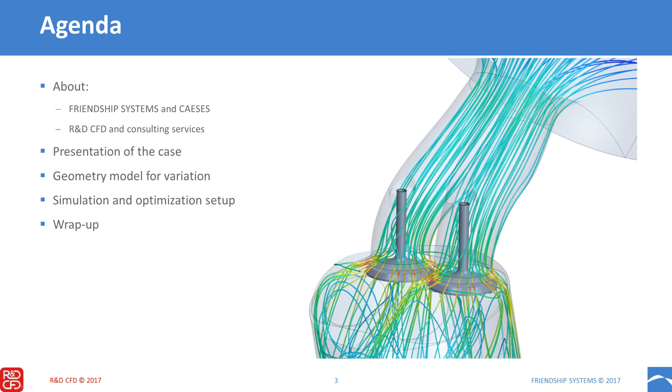So to start with Friendship Systems, who are we? We are a company, a software company mainly, that partners up with our customers to solve any kind of problems that they encounter in the so-called simulation-driven design process. The company exists since 15 years, and we have a lot of experience in the fields of geometry parametrization, specifically of complex geometries, as well as optimization.

So what do we do in this software? The software has a few different components. The first of all is the optimization part. So here it offers all the algorithms that you would need to drive an optimization process or simply a DOE process. And when you generate all the data during the optimization, you have to manage that data somehow. It's geometry data, simulation data, other kinds of results, and that needs to be organized and managed. And finally, you need assessment tools to analyze this data and draw your final conclusions from the optimization process.

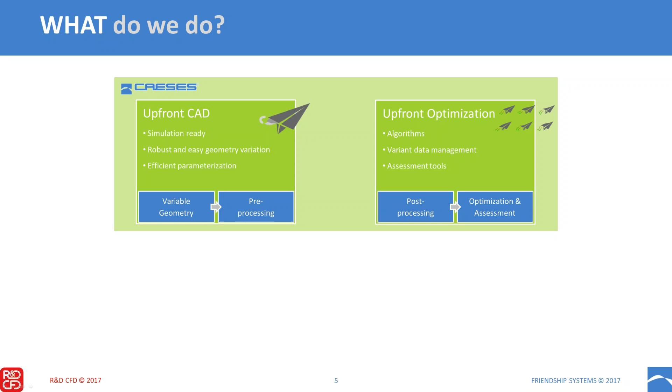And another important point is the efficient parameterization of the geometry, so that you describe your geometry with as few parameters as possible, which definitely helps you to save time in the optimization process. And to complete the whole process, we have a generic interface that can be used to couple our software CAESES to any type of external simulation software, most often CFD tools, that will then, in the optimization process, take care of the meshing and the solving and possibly post-processing of these cases.

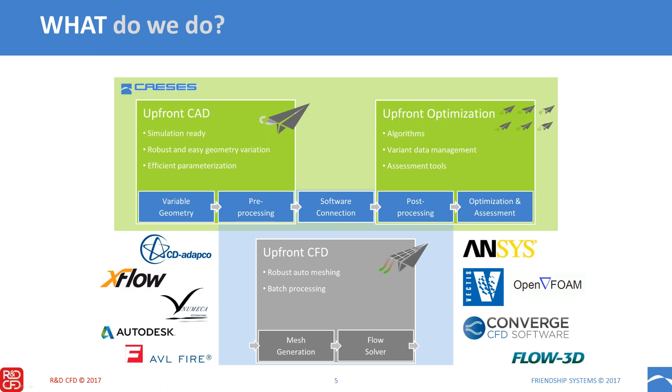So the first question, which I think maybe is not so difficult to answer, is why should I automate my design process with CAESES or in general? And the situation that we have is that laws and regulations, but also the tough competition in the market, demand a very high level of performance in modern engine design. So the, let's say, old type of process where you have a manual iteration between your CAD generation, creating a mesh, running CFD, and then post-processing the results, and then going back to the beginning.

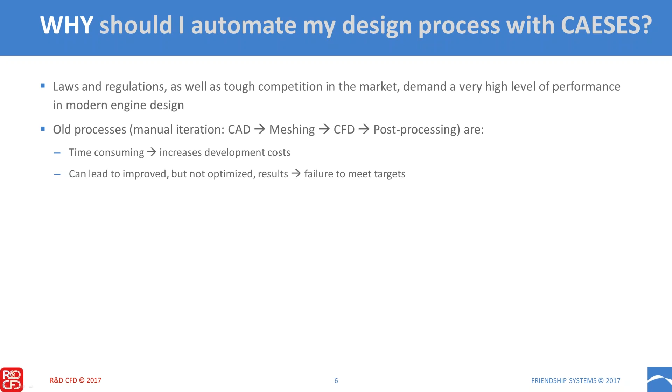This type of process is time-consuming for one, which of course increases development costs. And it can certainly lead to an improved design by iterating in this way, but not necessarily to an optimized design, so that there's going to be failure to meet the design targets. The automation, on the other hand, can shorten the development times because you can run everything in an automated process without user interaction. Can reduce the design cycles.

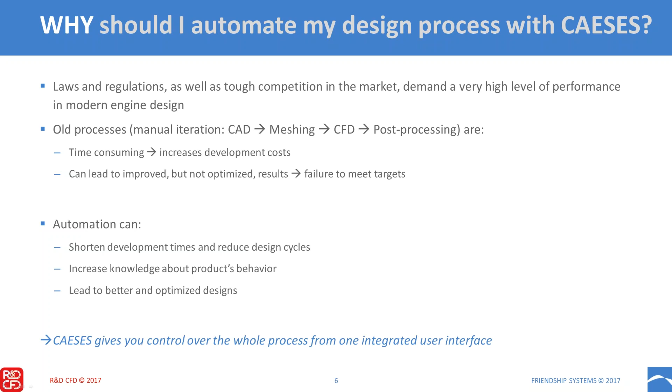And I think apart from leading, of course, to better and optimized design, I think an important point is that you can also increase very early the knowledge about the behavior of the product with respect to changing parameters and the feedback in terms of performance that these changes have. And of course, our tool CAESES is intended to give you control over this design process from an integrated and single user interface.

Another question, which for many people I know is a bit more difficult to answer. I told you a very important part of CAESES is this CAD system. So the question might be, why do I need another CAD system? So maybe you have already a traditional CAD system that is used to run the whole PLM process, CATIA, NX, Creo, whatever. And why do you need to include another additional CAD system into your process?

The situation here is that most of the typical bottlenecks that we encounter and our customers encounter when they want to run an optimization or design exploration process are actually related to the handling of the geometry. So in traditional CAD systems, for example, the geometry variation is often difficult or prone to failure. So it means you're changing some parameters and then the model fails to regenerate. Another point is that it is often difficult to consider, or maybe that's one step further, automatically fulfill certain constraints for manufacturing and so on.

And another bottleneck that is related more to the structure, how the companies work, is that the simulation engineers often depend on the CAD department to provide geometry variants. So if they want to change something in the geometry, they have to ask the CAD department to provide the new geometry. And that, of course, as you can imagine, not only costs a lot of time, but also is not really suited for automation.

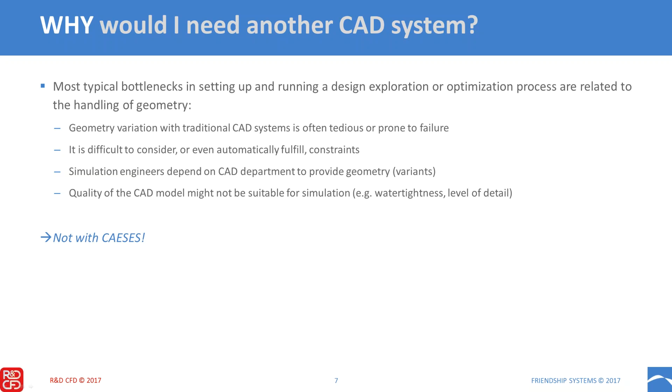So let's have a look at some powertrain applications that you can use this system for. The first of these is ports, which we will talk some more about today. Here you would like to directly control flow relevant parameters in the port geometry, for example, the distribution of the cross-sectional area along the path of the port. Maybe some specific aspects like considering blocking due to the valve bossing and stem that you want to consider in your cross-sectional area distribution, things like that. But we will see more about ports later on.

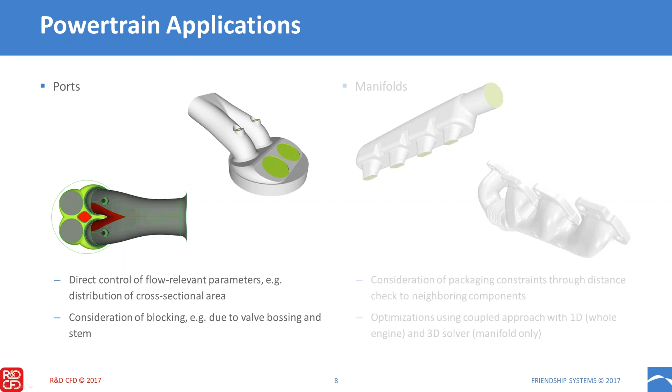Another application in the field of powertrain are manifolds, exhaust manifolds, intake manifolds. Here often an important point is the consideration of packaging constraints, and we have the possibility in CAESES to do a distance check to neighboring components so that you can make sure when you're varying the geometry that a certain minimum distance between the components is maintained. And we have done some work on this in the past.

A very interesting aspect here is to also couple 1D and 3D CFD solutions where you consider the whole engine system with a 1D systems simulation, and the manifold is then computed in detail using a 3D CFD solver.

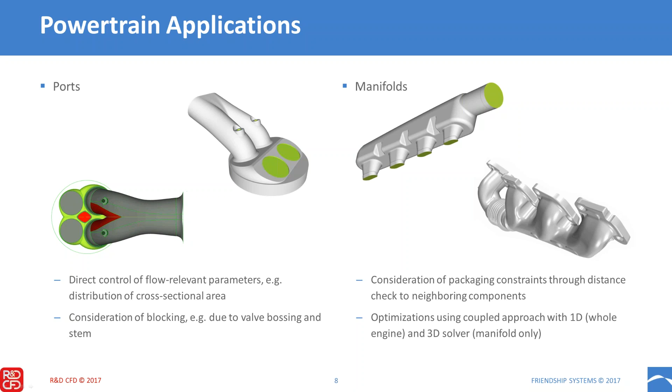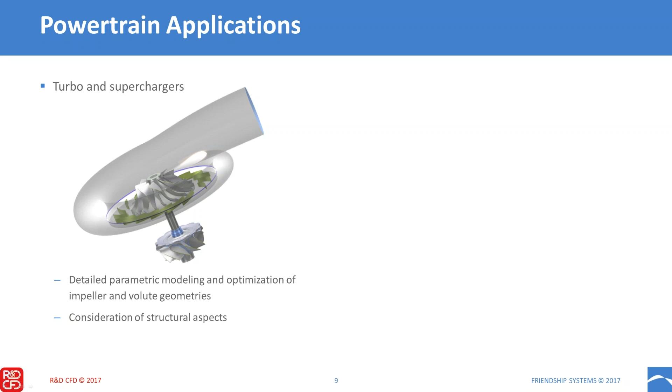Another application are turbo and superchargers. So here we have a lot of capabilities to do a detailed parametric modeling of the impeller geometry, but also the volutes. You can combine flow aspects with structural aspects for the turbine blades, for example, the strength and vibration connected, of course, to their flow behavior.

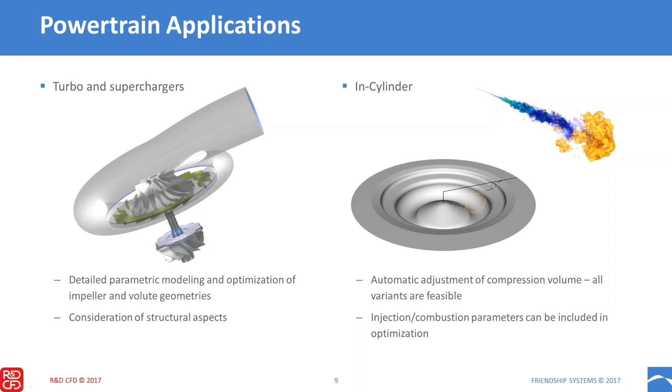Of course, you can combine the geometry optimization with other parameters related to the simulation, like injection timings, injection profile, spray angle, things like that can be taken into account in the optimization in parallel with the geometry optimization.

Exhaust systems are also another application. So here we have all kinds of ducts, diffusers, or urea mixers, things like that. Here we can use, of course, parametric morphing-based approaches, or an example that we also see here is the optimized routing of exhaust tubings under consideration of packaging. And many more applications in the field of powertrain that I'm not mentioning specifically now.

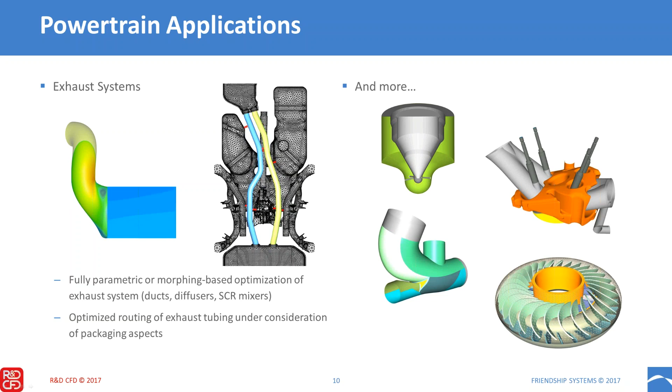So finally, how can you make use of CAESES? There are basically two ways. The first is as a so-called user. A user uses pre-configured models and setups. This doesn't need any training, so you don't need to learn how to use CAESES in detail. And you can make use of generic models that are provided by us, by Friendship Systems, or custom-made models that we can also provide. Or if you have an internal developer, so an internal CAESES expert that can create these models, then other people in the company can make use of that.

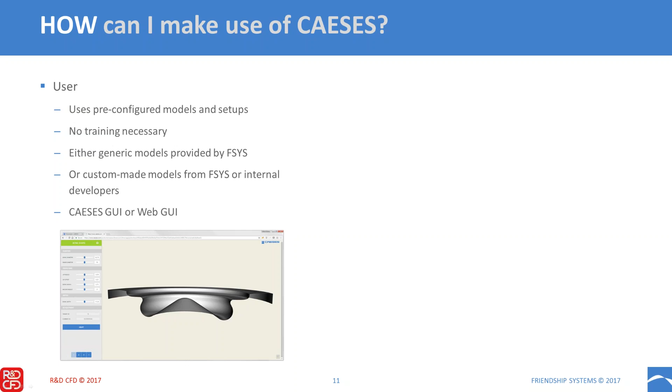The interface is either the actual graphical user interface of CAESES, or we also have the possibility of wrapping projects into a web interface that can be used in a very easy way and allows just limited access to a certain setup, parametric model, optimization setup, and so on.

And the second option is as a so-called developer. So this is basically the CAESES expert that is able to create complex parametric models or optimization setups for his own use or for other users in the company. And this, of course, needs a certain amount of training. And as I mentioned, it can support internal users, but also offer his services as a consultant.

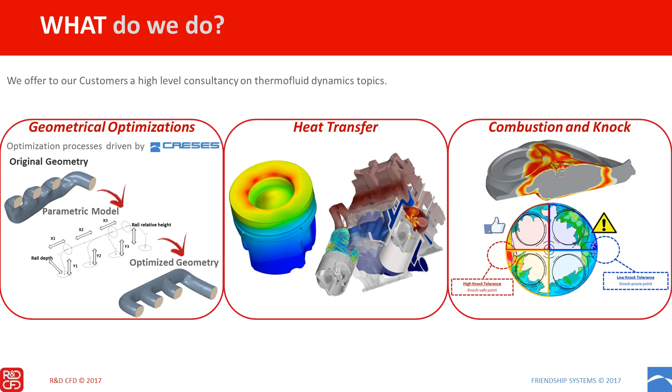We are very active on the combustion side and on knock simulation and prediction. Furthermore, we developed during this year proprietary approaches for sloshing simulation in tanks. We can simulate turbomachinery in a single or multi-phase way, and we are now approaching in a very efficient way detailed chemistry, especially related to pollutant emissions and to the knock behavior of fuels.

During these years, we developed some proprietary models, especially related to heat transfer, to knock in LES or RANS frameworks, and a statistical knock model that can be used in a RANS approach.

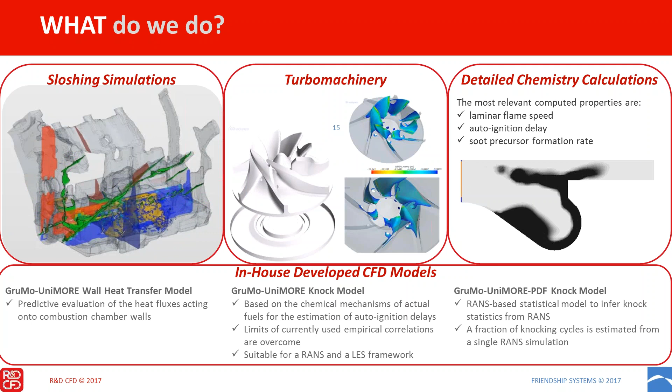As I told you a few minutes before, we can offer customers a joint consultancy with the Friendship Systems team, as we have done in previous years. We can offer our high expertise on the fluid dynamics side in order to carry on the project from its creation up to the final report with the optimized geometry that can be delivered to our customer.

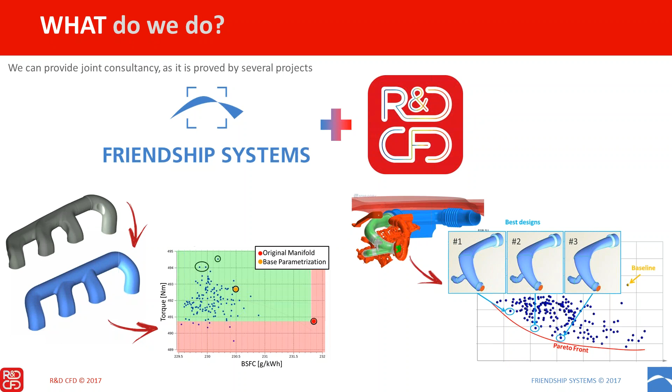All right, thank you, Giuseppe.

So now let's take a look at the example case that we worked on. So this, as I mentioned already, it's going to be an intake port. And as you probably know, intake ports along with the valves that are located at the end of them are responsible for the mixture formation, especially in GDI and diesel engines.

Also the charge motion, where you would like to create well-structured vortices so that you minimize the energy dissipation in the cylinder. And also they are responsible for the trapped mass of air that you will finally have in the cylinder for combustion. And this is important when you want to increase engine performance. So our topic today is an optimization of an intake port.

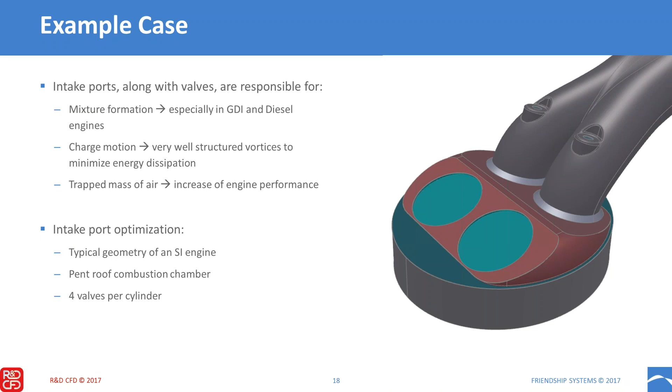And what we have here is a typical geometry of an SI engine. We have a pent roof combustion chamber, as you can see in the picture on the side, and 4 valves per cylinder. The design targets that were followed in this optimization are the maximization of the discharge coefficient or port permeability. Giuseppe will tell you more about all of these targets. The second one is the tumble ratio, and these two were the optimization targets.

We want to optimize these 2 values, and in addition we also evaluated some other parameters like the turbulent kinetic energy in the region of the spark plug, as well as the swirl motion in the cylinder, also known as omega tumble. Again, Giuseppe will explain these things in detail.

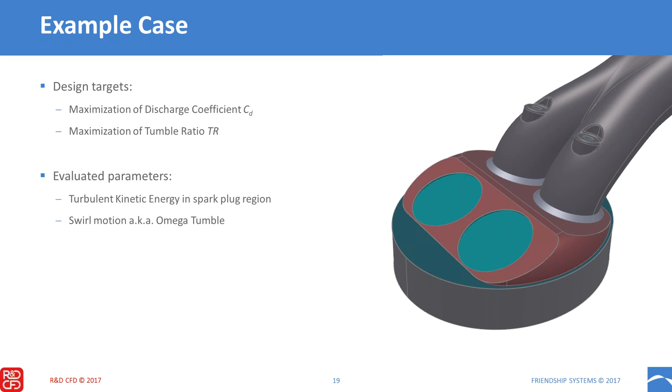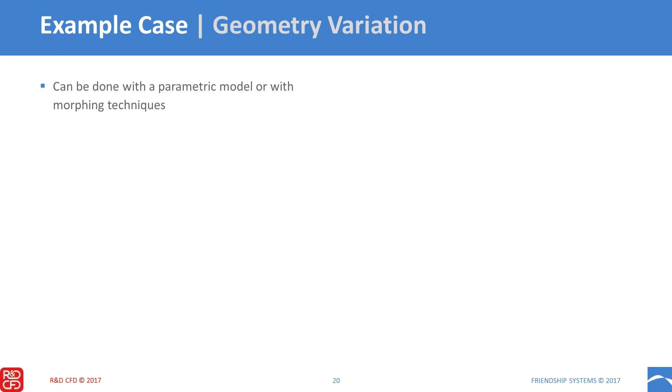So I will first of all take a look at the geometry side of the optimization. For the geometry variation, there are different options that can be used within CAESES. You can use a parametric model, or you can use morphing techniques that are applied to an imported model. In this case, we used parametric modeling, and we used some special advanced surface modeling technologies that are available in CAESES.

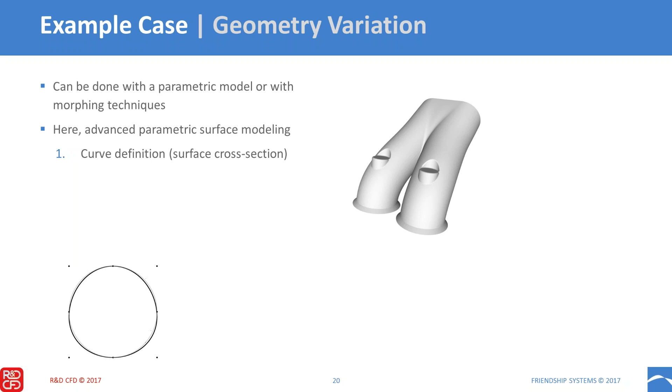And to model the main duct geometry in the port, we use this advanced parametric surface, which is based on a curve definition. So you start by defining a cross-section through the surface in question. And you see here at the bottom a cross-section geometry where one of the parameters is varied. And these parameters that define the shape of the cross-section will change their value in the direction of the surface, and that can be expressed by parameter distributions.

So, for example, you have the cross-sectional area of your port, and that will change along the path of the port. And you can express this change in the parameter distribution, and this parameter distribution can then be controlled by parameters. And finally, if we combine the surface cross-section definition with the parameter distribution, we can generate the surface and then add all the additional components to make up the final geometry.

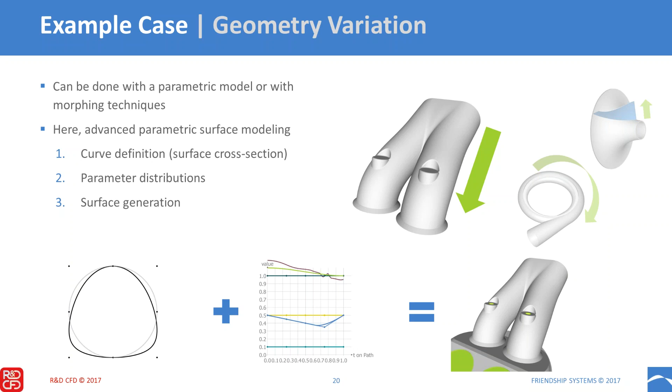So this is an efficient way of describing complex, also free-formed geometries in a parametric way, which allows you to have a lot of flexibility in the geometry variation while using a low number of parameters, as low as possible at least. So let's take a look at the parameters that we changed in this specific optimization.

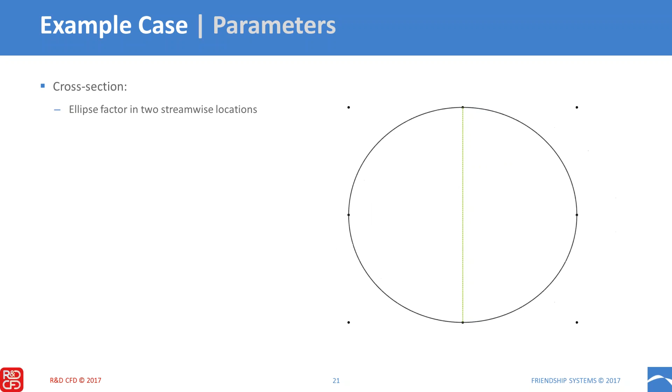So let's start, the first ones are related to the cross section. Here we have a so-called ellipse factor, which basically defines if the cross section is circular or rather elliptical in shape. And this also has an impact on the area in this case. We control this ellipse factor in 2 streamwise locations along the path of the port. These are the first 2 parameters.

And then we have another 2 parameters that control the so-called eccentricity of the cross section, also in 2 different streamwise locations. The eccentricity is basically the location of the center of area of the cross section. So you can see in the animation that we go from a shape where the center of area is located above the middle to a shape where it is located below the middle.

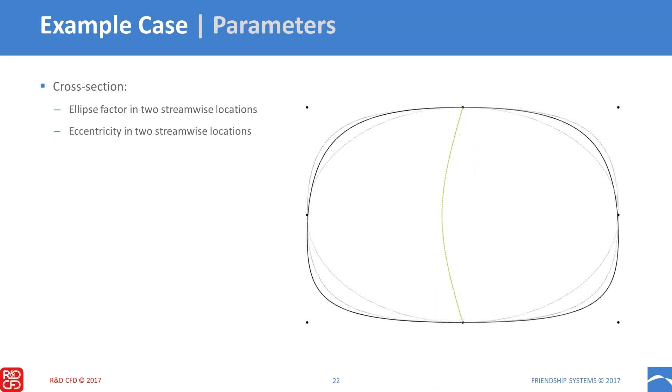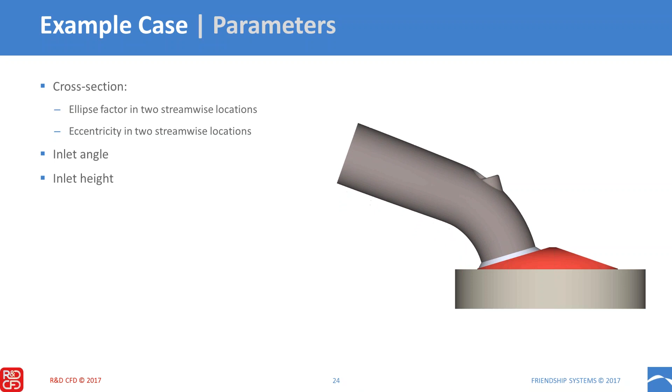Then we have another parameter that controls the angle at the inlet of the port. I think that's pretty clear to see in the animation, what kind of impact that has. Also the height of the inlet. And finally, we have a parameter that controls the straight length of the path at the inlet of the port.

So you can see in the top view, in the Z projection of the geometry, it controls basically the curvature at the outer side of the port. So these are all the parameters that we used in the optimization. In total, we have 7 parameters, and then we will see what kind of impact they have.

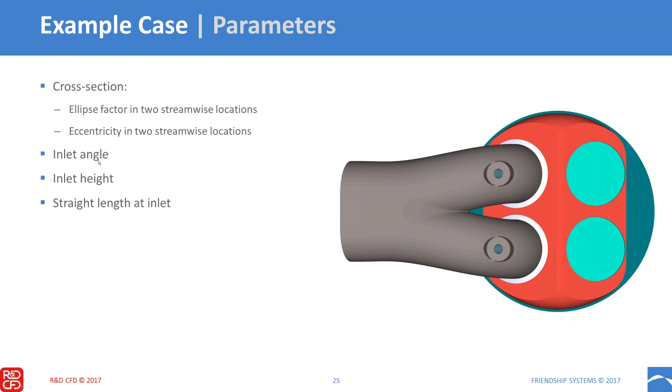And finally, one word about constraints. In this case, we didn't apply any constraints because it's, let's say, a special example case that we generated here. But of course, in an industrial application, you would want to consider certain constraints, and these typically concern manufacturing constraints. So for example, draft angles for casting, that you keep a certain minimum draft angle at the sides of the geometry, or a certain minimal radii because of the milling process, things like that.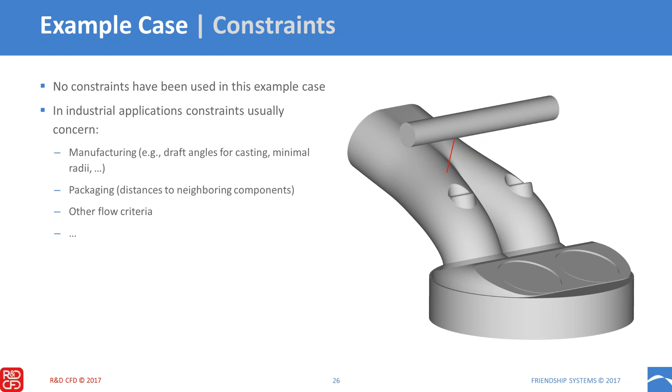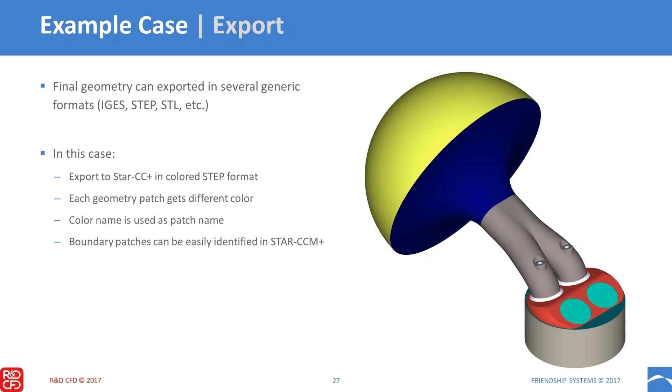And then when you import the geometry in STAR-CCM+, you can identify the boundary patches by their name and address these different patches to assign, for example, different mesh settings or different boundary conditions. And that concludes the geometry part. So we have a parametric geometry model. We have defined the interface in terms of geometry export to the simulation code. And now Giuseppe again will tell us some more about the CFD setup and what we did in the optimization. And let me switch to Giuseppe. Yes.

Okay, thank you, Mattia, once again. Just a few words about the design targets that we defined during our optimization process. First of all, we defined a discharge coefficient that is the ratio between the actual mass flow rate that flows inside the ports and an ideal mass flow rate of air that flows through a reference section that in our simulation is defined as the sectional area of the cylinder on the equal pressure drop of the system. That means that during our simulation we computed the actual mass flow rate flowing through the ports, and we compared it with the ideal one flowing through a reference section on equal difference of pressure between inlet and outlet.

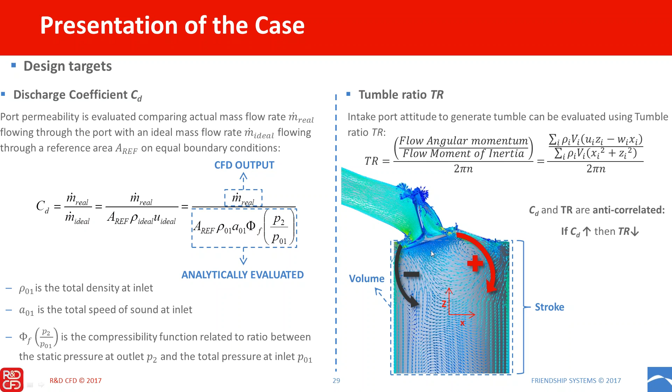As Mattia stated before, we took into account two evaluation parameters as well. They are not targets for the optimization, but of course we have to take care about them because they are important during the port design. They are the turbulent kinetic energy in the spark region, because of course it is important to have a high level of turbulence when we are very close to the spark plug.

And we have to consider that there are some secondary motions, secondary flow motions inside the cylinders, such as swirl motion, or in SI engines they are defined as omega tumble motions, that are characterized by a flow motion whose axis is parallel to cylinder axis, and they are not so desirable because they dissipate energy and they can affect the flame front propagation during the combustion.

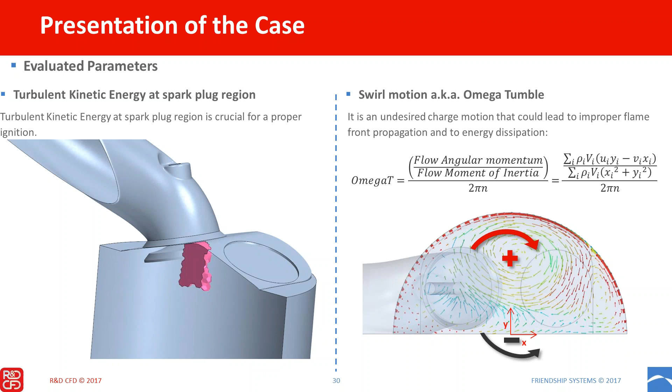Then we want these omega tumble motions to be as small as possible. And the omega tumble is defined in a similar way as we did for the tumble ratio.

Moving to the CFD setup, we reproduced in our simulation what is usually done at a steady state flow test rig when intake and exhaust lines are tested. I mean, we used the intake ports and the dome of the combustion chamber, and we added a plenum in order to take into account the environment.

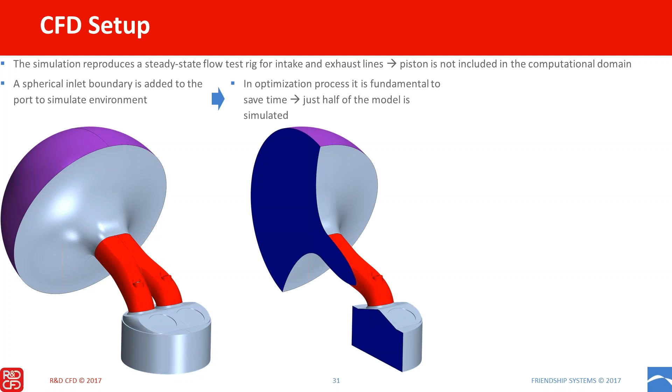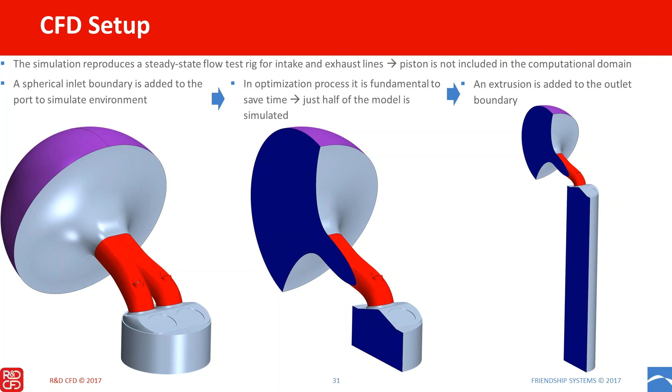Piston, of course, is not included in the computational domain because this is a steady state flow motion of the intake port. Then we considered just half of the computational domain in order to save time. This is crucial during optimization processes. And we extruded the outlet boundary in order to allow the flow to develop and not be affected by the boundary conditions that could be too close to the cylinder dome.

In order to take into account flow separations and all fluid dynamic effects that could affect both discharge coefficient and tumble ratio, we used a low Reynolds approach for our mesh. We used 12 layers next to the walls, with an overall number of cells approximately equal to 600,000 on half of the domain. And this led us to need about half an hour for each design, from the geometry generation by CAESES to the output results.

The boundary conditions were defined with a total pressure at the inlet and a static pressure at the outlet, and we imposed a symmetry plane at our geometry. The simulation is steady state, and we used the k-omega SST turbulence model in a RANS fashion with a low Reynolds wall treatment approach, as I explained before. The operating flow is air, modeled as an ideal gas.

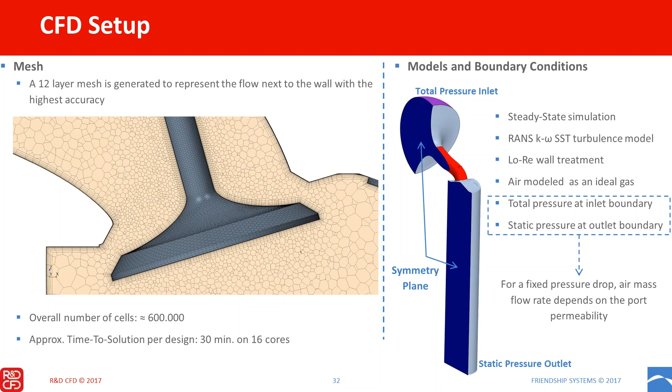And of course, once the pressure drop is imposed, the mass flow rate of air through our system depends on the effectiveness of our geometry. I mean, it depends on the port permeability.

The process we followed started with a preliminary step where a DOE analysis was carried out using a Sobol algorithm, with 40 investigated designs, in order to capture the driving factors during optimization and to find some relevant correlation coefficients. Then, thanks to this DOE, we moved to the optimization. It was performed in two subsequent steps, each one starting from the previous one. So the first optimization, performed with the Dakota algorithm, started from the response surface calculated by the DOE during step 1, and step 3 used the results obtained by step 2.

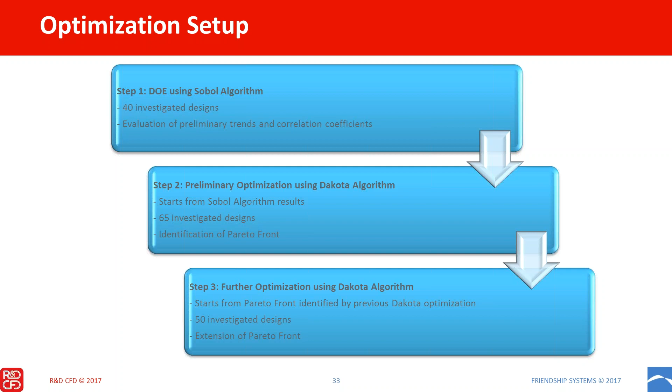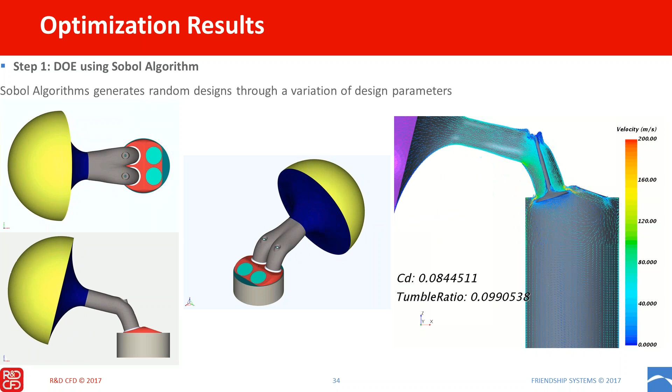Here is the animation of all the geometries we investigated during our optimization process, and they were all successful during the generation by CAESES. In the right part of the slide, we can see the flow field that deeply changes while the geometry changes. And this is the reason why we had very different results from one geometry to the other.

Just to give an idea about the output that we can have from an optimization process, it is fundamental to understand that once we identify our targets, that in our case are the maximization of tumble ratio and discharge coefficient, it is very important to understand which are the geometrical parameters that can deeply affect the variation of our design targets.

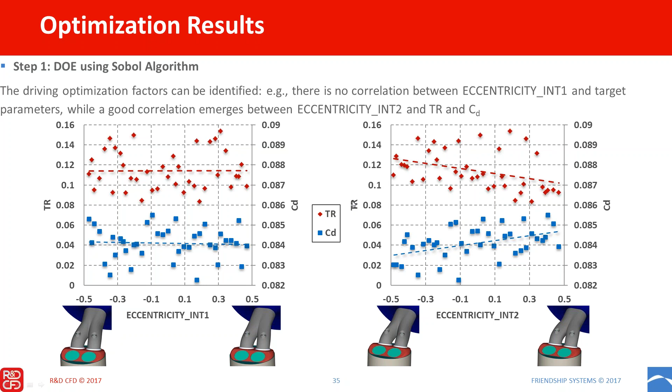It is very different instead if we consider the eccentricity int 2 parameter. We can see that there is a high correlation between the discharge coefficient and the variation of this value, and an anti-correlation, because the slope is negative in this case, between the tumble ratio and the eccentricity int 2 parameter.

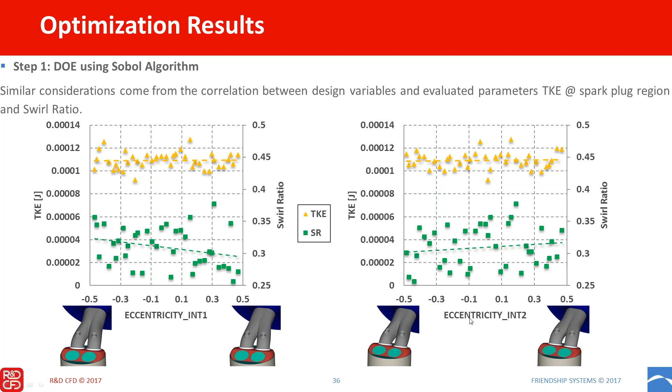Same considerations can be drawn for the evaluated parameters as well. We can see that they can be affected by geometrical parameters, as for example the swirl ratio and the eccentricity int 1, or completely not, as it happens for the turbulent kinetic energy at the spark and the eccentricity int 1 design parameter. And practically the same can be seen if we compare the behavior of the evaluated parameters along with the variation of eccentricity int 2.

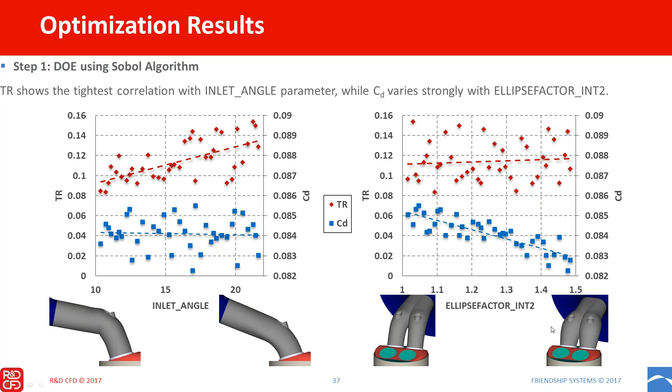Thanks to this preliminary DOE investigation, we are able to analyze a distribution of solutions, and a very preliminary Pareto front can be traced. The Pareto front is the region of the diagram where all the best results lie. Of course, this is an approximation of the Pareto front just to give an idea about its shape in our design.

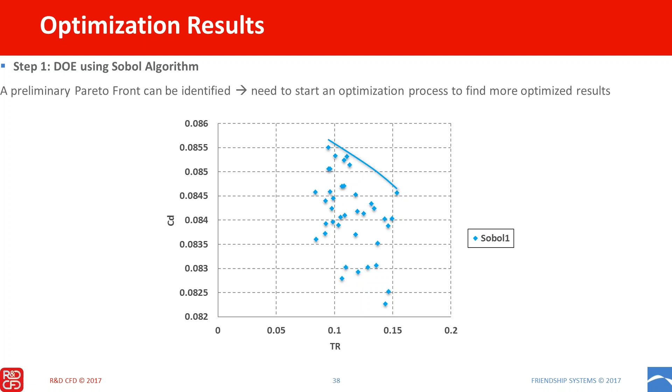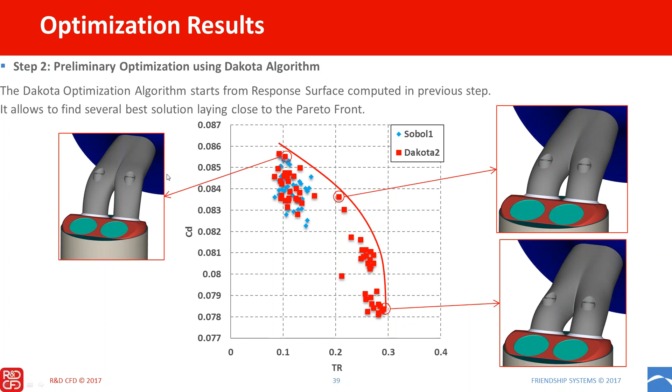This means that we expect that all the best solutions will be characterized by a very, very short path for the linear portion of the intake port, and by as high as possible an angle for the inlet duct.

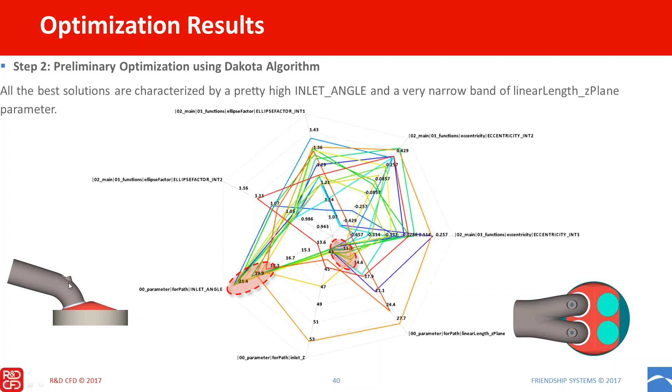For example, if we have a look at all these designs, we can see that there is just one that is able to have a gain of discharge coefficient, improving or not reducing too much the tumble ratio. It depends, of course, on the application that the engine is designed for. But this, for example, could be a very good trade-off in terms of design choice.

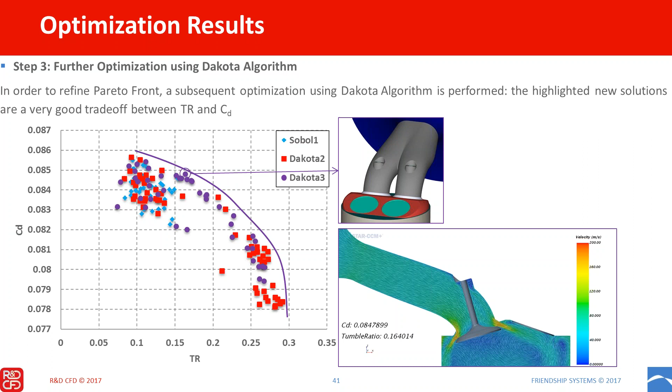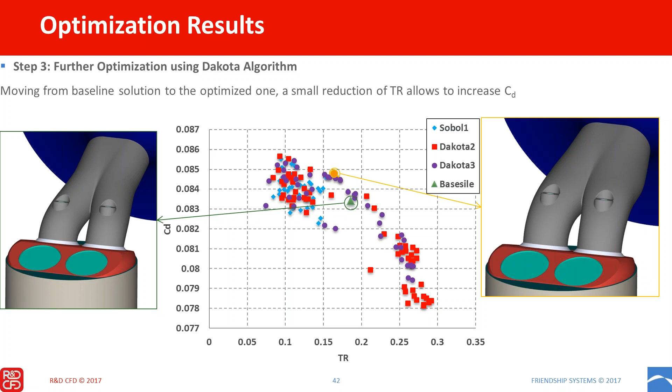Then the meaning, of course, of this diagram is that we are now able to choose the best solution to solve our need in terms of discharge coefficient or tumble ratio.

We have about 5 minutes left. Before I fully conclude the webinar, there's 2 questions that we can maybe try to address very quickly. Giuseppe, maybe the first one can be answered easily by you. The question is, why do we have a spherical boundary condition at the inlet? What is the significance?

Okay, the reason is that this kind of boundary shape allows us to mimic in the best way the environment. Because of course now we added a fillet to the port in order to link it to our environment. That is usually what is done during the simulation. But once you can use a spherical boundary for the inlet, you are avoiding that your flow could be oriented in some way.

If you use, for example, a box, it has to be large enough to forget the presence of walls, or you should, for example, use a squared box large enough but with all pressure inlets. I mean, this is the most effective way to reduce the number of cells and to avoid that that boundary condition could affect the behavior of the port. Okay, yeah, I think that's pretty clear.